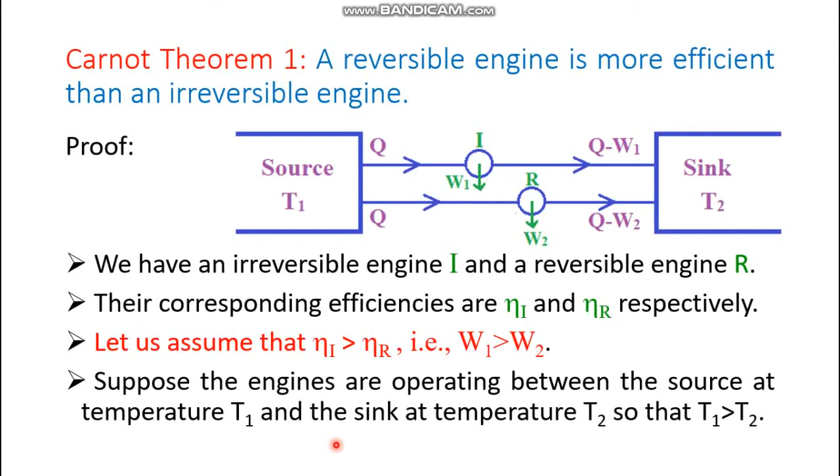So it is possible only when the work performed by the irreversible engine W1 is greater than the work performed by the reversible engine W2. So if it is assumed that eta I is greater than eta R, then it is also assumed that W1 is greater than W2. Now suppose the engines are operating between the source at temperature T1 and the sink at temperature T2, so that T1 is greater than T2.

For engine I, heat supplied by the source is Q. Work obtained is W1, and heat rejected to the sink is Q minus W1. Let's redraw this picture here again. When you are taking notes, you need not draw this again; for my convenience I am just bringing this diagram here. So Q amount of heat withdrawn, W1 amount of work done, and Q minus W1 amount of heat deposited to the sink.

Conversely, for the reversible engine, heat supplied by the source is Q. Work obtained is W2. Look at the direction of the arrow. The arrow is in the outward direction, which means work is done by the engine. And here Q minus W2 amount of heat is rejected to the sink.

So we have already assumed that W1 is greater than W2. Then what about Q minus W1 and Q minus W2? Definitely, if W1 has greater value, then Q minus W1 should have lesser value. So Q minus W1 is less than Q minus W2. Up to this it's okay, no problem.

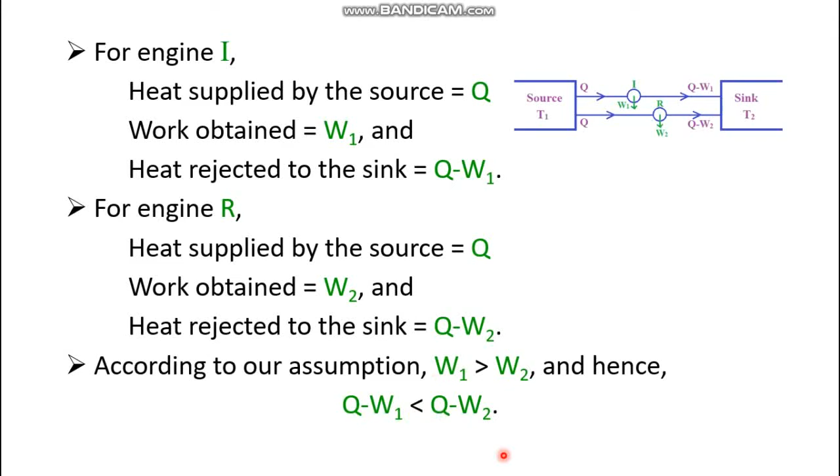Now let us carry out a cyclic process in which engine I is performing the forward process while engine R is performing the backward process, like this diagram. Look at the direction of the arrow. This one is as usual like the previous diagram, but this one has reversed its direction. In the previous diagram it was going from left to right, but now it is withdrawing heat from the sink and depositing heat to the source.

And here look at the direction of the arrow of the engine. Here the arrow is in the inward direction. That means work is done on the system. Here work is not obtained. You have to provide some work to the system. That means you have to provide some energy. It may be electrical energy or something else.

That is why it is red colored, and the direction of the arrow, instead of outward, is in the inward direction. So this way we have completed a cycle here. So what about the description of this cycle?

Q amount of heat is withdrawn, W1 amount of work is performed by the irreversible engine, then Q minus W1 amount of heat is deposited to the sink. Now from the sink, Q minus W2 amount of heat is withdrawn. Then W2 amount of work is provided from outside. So this work is combined with this one. So Q minus W2 plus W2 becomes Q. So the Q amount of heat is deposited or rejected to the source. This way the cycle is completed.

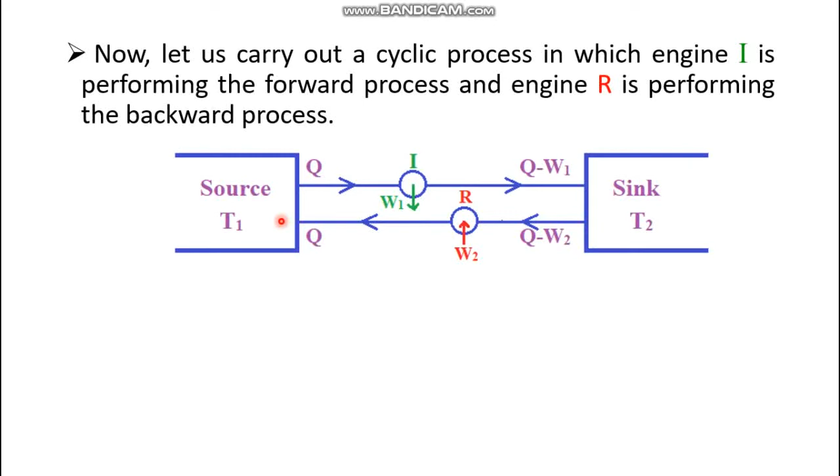Let's see the description. The amount of heat supplied by the source is Q to yield W1 amount of work, and Q minus W1 amount of heat is rejected to the sink. Whereas Q minus W2 amount of heat is taken up from the sink by performing W2 amount of work to return the same Q amount of the heat to the source. Okay.

So in this complete cyclic process, the source has not ultimately lost any heat. Why should it lose any heat? Because the source, look at the picture here again, is releasing Q amount of heat and receiving Q amount of heat. So is it losing anything? No, it is not losing any heat. Okay, so this is described here. In this complete cyclic process, the source has not ultimately lost any heat.

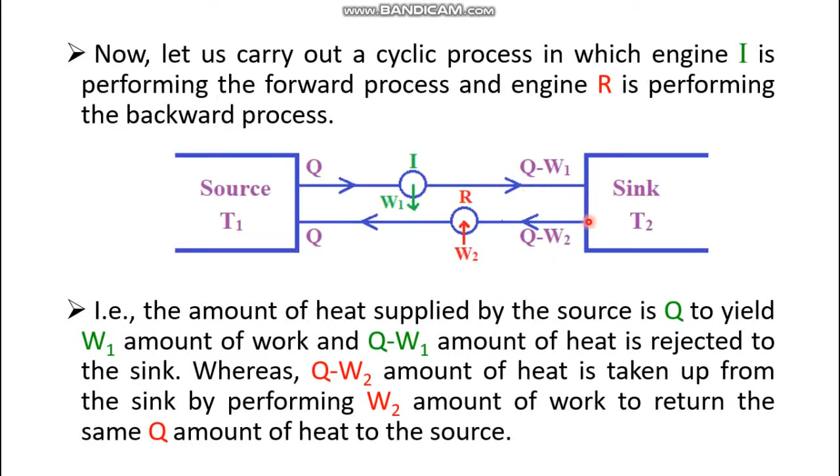But what about the sink? It has a different experience. It is absorbing Q minus W1 amount of heat but losing Q minus W2 amount of heat. So there should be some difference. So the coupled engine had yielded, due to that difference, W1 minus W2 amount of work, because W1 is greater than W2. So this amount of work has been yielded.

Okay, so since this amount of work is yielded, this is done in lieu of the heat lost by the sink. What about the amount of heat lost by the sink? Now it is (Q minus W2) minus (Q minus W1). Sorry, this is lost heat minus absorbed heat. Okay, Q minus W2 is the lost heat and Q minus W1 is the absorbed heat.

So this is equivalent to the work obtained, because the result is what? (Q minus W2) minus (Q minus W1) is nothing but W1 minus W2. Okay, so this is equivalent to the work obtained. That means what? That means heat is extracted from a lower temperature body to produce work.

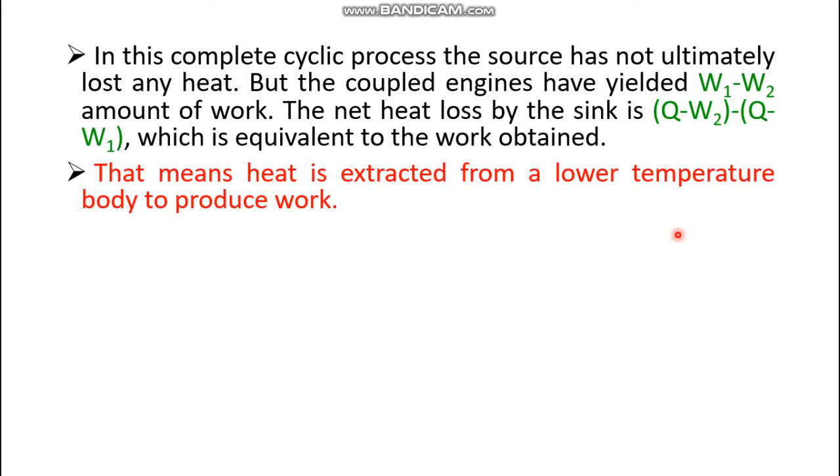Is it actually following the second law? The answer is no, it is not at all following the second law. It is contradicting the second law. So this is contrary to the second law of thermodynamics, and hence it is not possible, because otherwise it would have become the perpetual motion of the second kind, and in reality this is not possible. So the opposite statement of the Carnot Theorem 1 is wrong.

Okay, that means the efficiency of the irreversible engine is not greater than the reversible engine. So the statement which is given in the Carnot Theorem 1 is correct. That means the efficiency of the reversible engine is always greater than that of the irreversible engine. Therefore, a Carnot engine which is reversible is more efficient than other engines which are irreversible. Hence, Carnot's first theorem has been established: a reversible engine is more efficient than an irreversible engine.

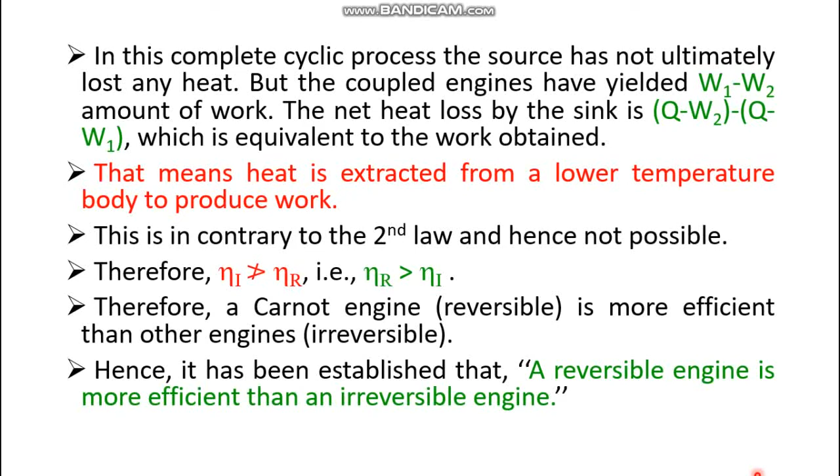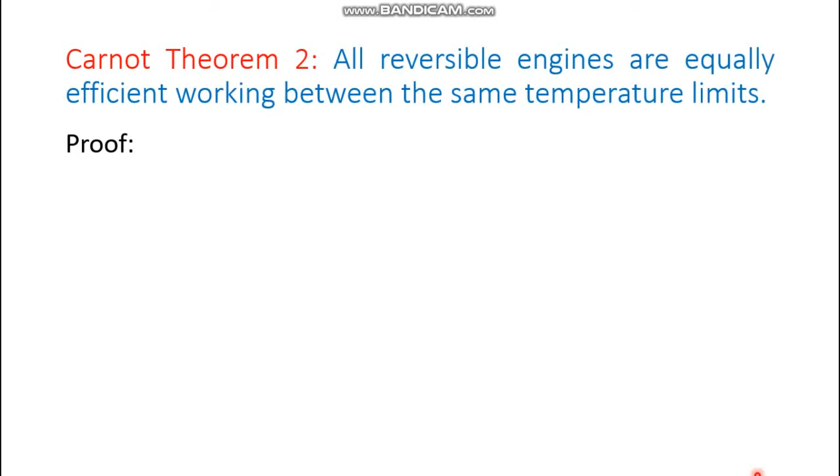So let's describe. Let's take two reversible engines R1 and R2 working between the source at temperature T1 and sink at temperature T2, so that T1 is greater than T2. R1 can perform W1 amount of work, whereas R2 can perform W2 amount of work, both by taking up Q amount of heat from the source and rejecting Q minus W1 amount of heat and Q minus W2 amount of heat to the sink respectively.

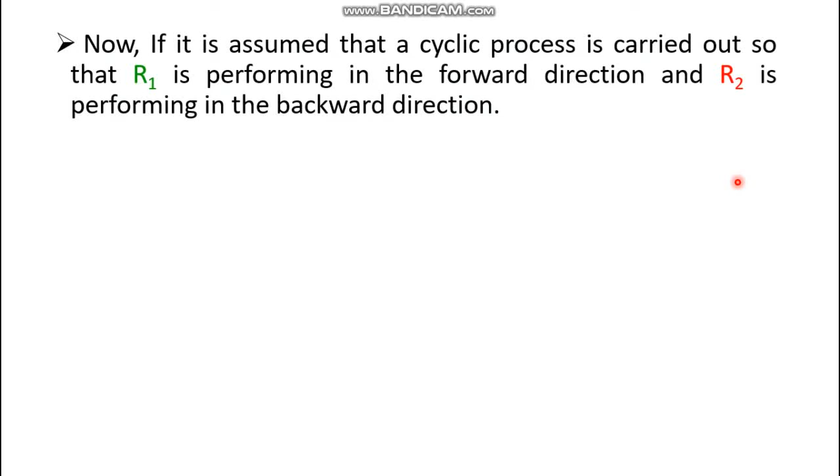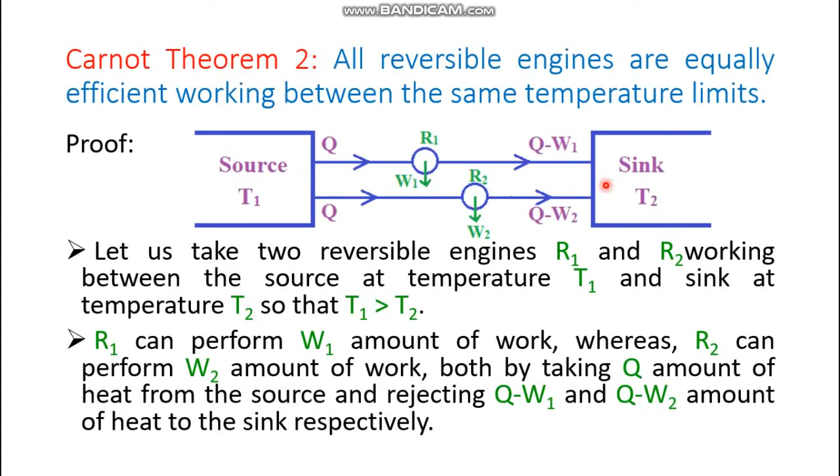But look at this picture right now. Here, this direction has been changed. Now heat flow is taking place in the reversed direction. Instead of source to sink, heat is now going from sink to source. The source is giving away Q amount of heat and taking up Q amount of heat. But the sink has a different story. It is actually absorbing Q minus W1 amount of heat while it is releasing Q minus W2 amount of heat.

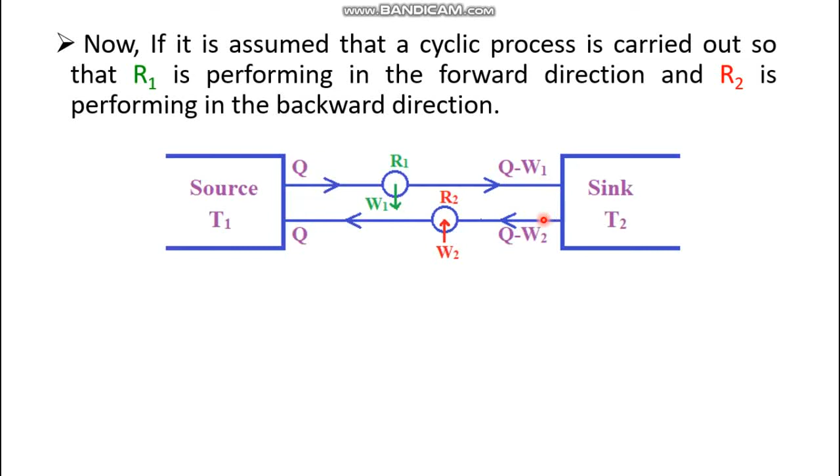So let's describe this. R1 takes up Q amount of heat from the source, produces W1 amount of work and rejects Q minus W1 amount of heat to the sink, while R2 is taking up Q minus W2 amount of heat from the sink, and from outside W2 amount of work is being provided. This W2 is combined with this heat, so Q minus W2 plus W2 equals Q. So Q amount of heat is deposited to the source. Thus the cycle is completed.

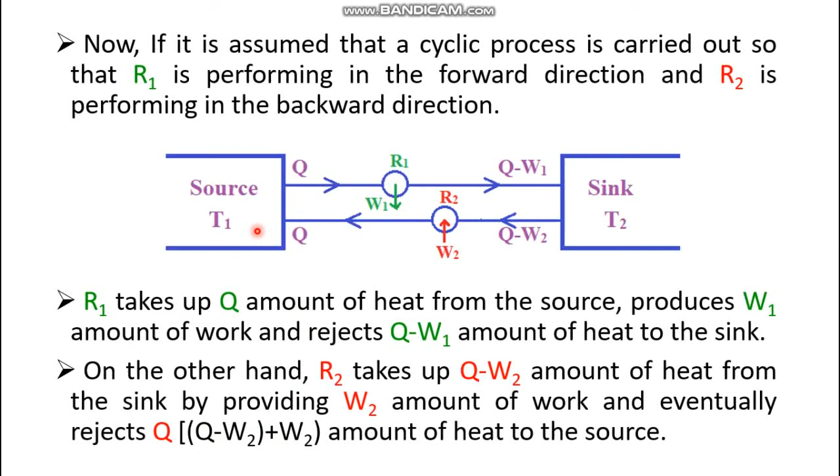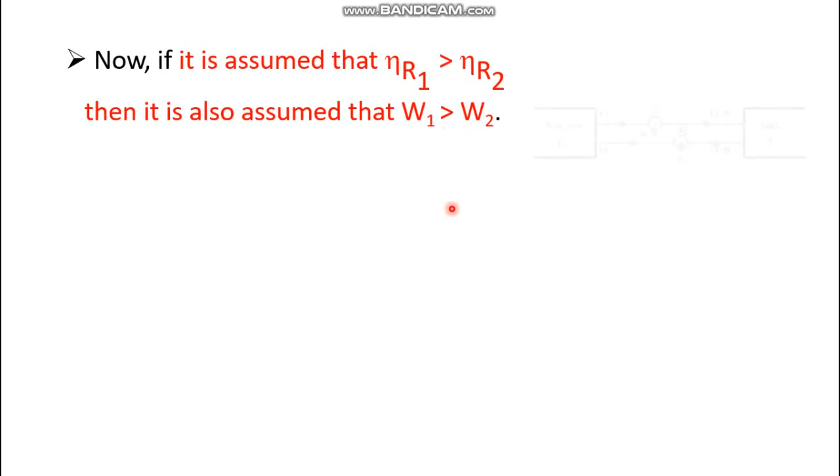Now let us assume that one of the reversible engines is more efficient than the other reversible engine. That means we are trying to contradict the second Carnot theorem here. If it is assumed, then it is also automatically assumed that the work W1 is greater than the work W2. The work performed by the first engine should be greater than that of the second engine. Let me recall the diagram here. You need not draw this while taking the note. Just for my convenience, I am redrawing here.

So the heat absorbed from the sink, which is colder than the source, minus the heat which is rejected to the source, which is the hotter body. Q minus W1 amount of heat is absorbed, and this is subtracted from the amount which is taken up from the sink. The amount of heat taken up from the sink is Q minus W2. That is heat absorbed from the colder body minus heat rejected to the hotter body.

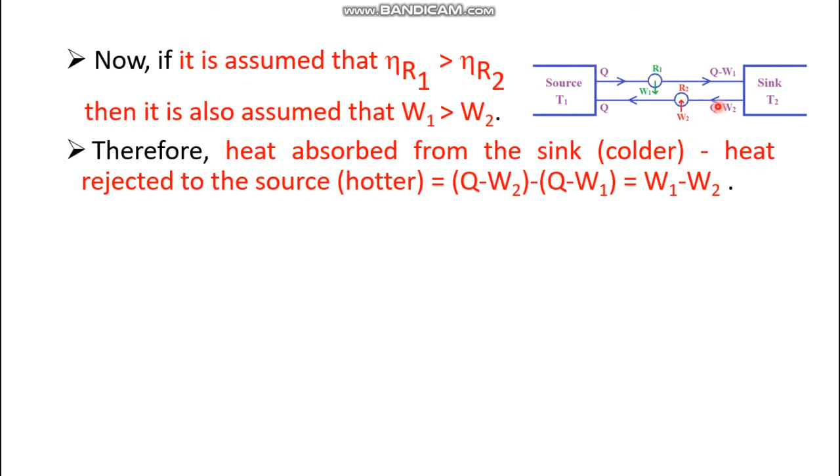And this way W1 minus W2 amount of work either is produced or is provided. Let's see whether it is positive or negative. This is definitely a positive value because W1 has been assumed to be greater than W2. That means work is being produced here, not provided from outside. So you are taking up heat from the colder body and rejecting heat to the hotter body, and in this regard you are converting some amount of heat into work, and that amount of work is W1 minus W2.

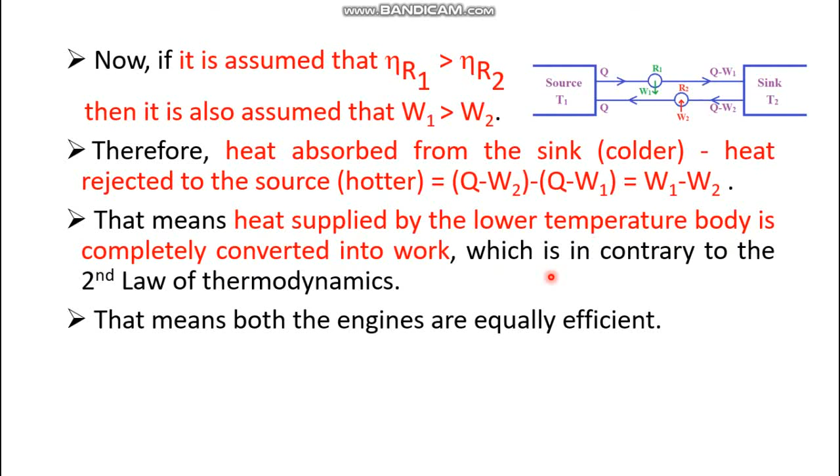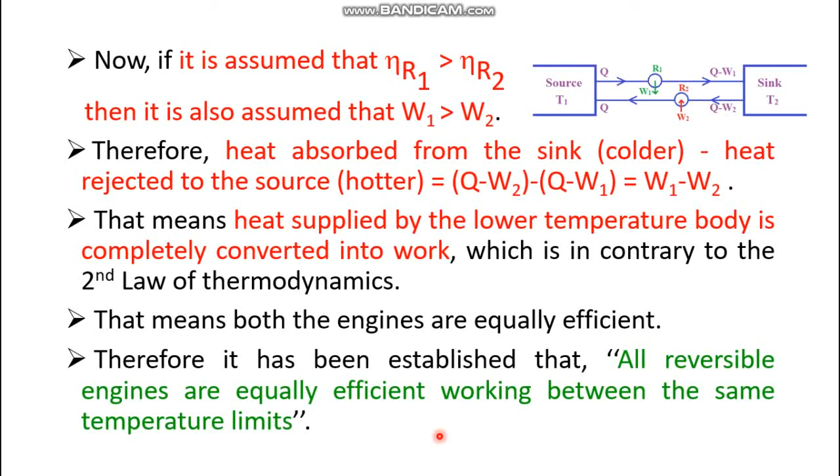Is it possible? Look, heat supplied by the lower temperature body is completely converted into work, which is contradicting the second law of thermodynamics. So this is contrary to the second law of thermodynamics. That means both the engines are equally efficient. Neither is more efficient than the other. Thus the second Carnot theorem has been established. What is the second Carnot theorem? All reversible engines working between the same temperature limits are equally efficient.